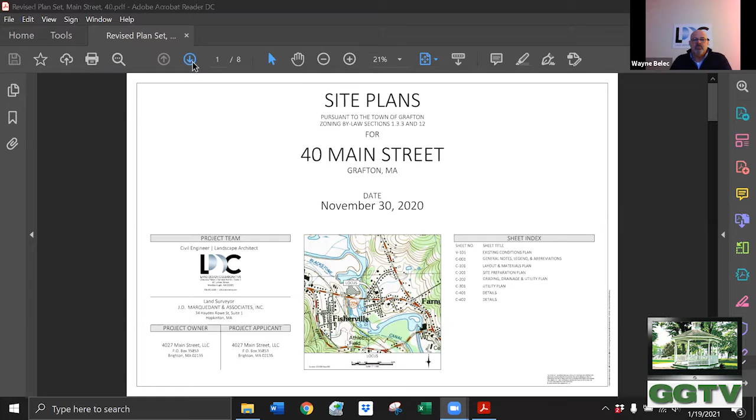So the property, Leah, if you wouldn't mind going to the existing conditions plan - there you go. Thank you. So the property, with north being straight up the sheet, is located at the northeast corner of Main Street and Cross Street. It's about 0.67 acres, and it's located in the Village Mixed Use District.

We had a few meetings with town staff. We had initially met with Chris McGoldrick, and I think Leah was in that initial meeting. And then we had an informal with the planning board to get their take on what was being proposed, and they seemed in favor of it. And then we had an informal with Leah, and that was probably a couple months ago before we got too far into the design.

And then as recent as last week, I had a follow-up meeting with Leah to address some of the questions that she had regarding redevelopment and grandfather provisions under 310 CMR 10.58, the riverfront provisions of the regulations. And then she had a couple things that she wanted to see on the plans as well.

So, like I said, 0.67 acres. The site is developed with 5 buildings on it. In the northeast corner is a garage on a foundation - there's no slab, it's a dirt floor. In the southeast is an old commercial building. To the northwest of the garage I referenced is a shed. And then to the east of the garage is number 27 Cross Street.

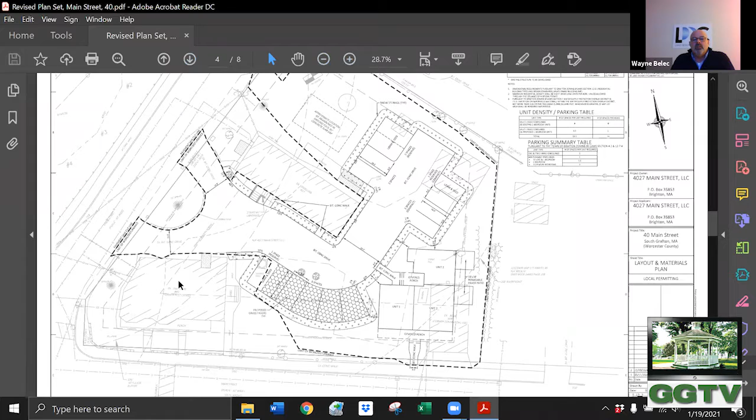What you'll see is a dashed line around the perimeter of the site. That represents the limit of work and limit of disturbance. Leah — or I think it was Samantha — called us on that, and I followed up in my conversation with Leah last week, and I believe I had the same conversation with Samantha, as to why we were showing it as both limit of disturbance and limit of work. The reason is it's a fairly compact site.

When all is said and done, it may not necessarily be the limit of disturbance — we're showing it that way as a worst case scenario. In the event the machine is working in the area and has to do some stockpiling or temporary placement of materials, we wanted to show it to that full extent. So in doing that, maybe the lawn gets scarred up — that would be a temporary disturbance situation.

The site will continue to be accessed from Cross Street. You come in a southeasterly direction, and in the most southeasterly corner of the site, the commercial building will be removed. What we're proposing there is 3 units, all connected, in compliance with the requirements of the VMU district. These will be market rate rental units, as are the other 6 units on the site. As a result of those improvements, we've proposed 14 parking spaces.

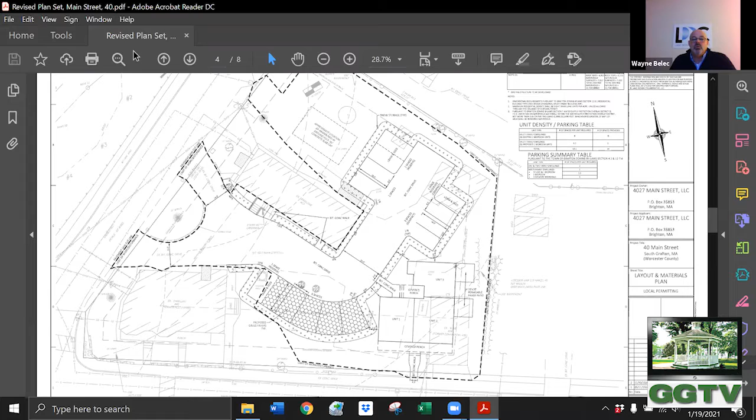Leah, if you wouldn't mind going to the next sheet, which would be the erosion sediment control plan. So one of the very first things we're going to do out here — Patrick is working with a couple of contractors to get some preliminary bids. I did let Patrick know that it's kind of early in the game, but he just wants to have an idea as to what he's looking at for costs and make sure a contractor is lined up to move forward following his receipt of all his permits.

So basically what he's going to be doing is, around the perimeter of the property on Cross Street and Main Street, there are some existing catch basins. He is proposing to install silt sacks, or inlet sediment traps, whatever you want to call them. Then he's looking to install an anti-tracking pad, remove the impervious pavement on site, install an anti-tracking pad out at the project entrance, and continue to install the erosion sediment control measures around the site.

He will be looking to remove the buildings and begin to move forward with the next phase, which would be the construction, the excavation of the foundation of the proposed building, which will then be followed by prepping the area for parking areas, bringing in the gravel, excavating, performing that work, and then removing the existing pool to the north of the building at number 27.

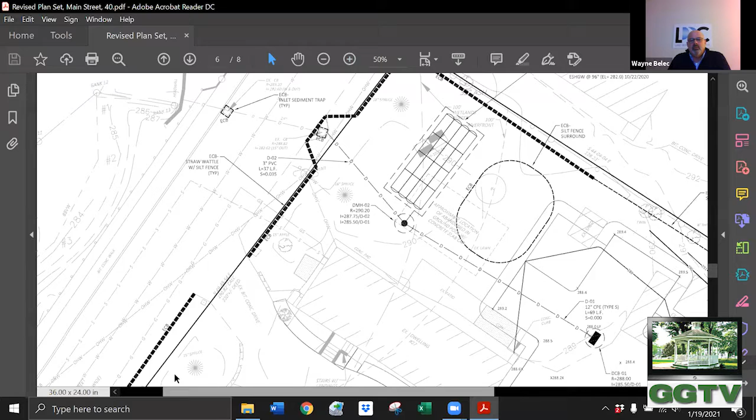That catch basin, I can't see - that rim elevation's a 288. The invert of that is 285.5. And it's a 12-inch pipe. So that puppy is fairly close to the surface, as high as we can get it. And that has got no slope, no pitch on the pipe. It's just going to surcharge and then flow into that structure prior to the infiltration system.

That system will then overflow into the down gradient catch basins. What we have done is we've modeled the site so that there is no increase in the peak rates of runoff for the storm events.

We did run a groundwater mounting analysis, looking at that - obviously having this in this location and having infiltration, detention, we need to maintain the 4-foot groundwater offset. In lieu of that, as you folks know, we could do a groundwater mounting analysis, which sometimes helps you, sometimes hurts you. In this particular case, it did help us as we had groundwater at 8 feet.

So what came from that analysis is we found that at about 2 3/4 feet, the groundwater mounting analysis indicated that the groundwater in that area would be mounted about 2 3/4 feet, allowing us a 2 3/4 foot separation from the groundwater to the bottom of the system. So we had added that to the bottom of the system. By the time we did that, the system was up fairly high. I think the bottom of stone of that system, or the bottom of the chambers, is around 285.5. So it's up pretty high.

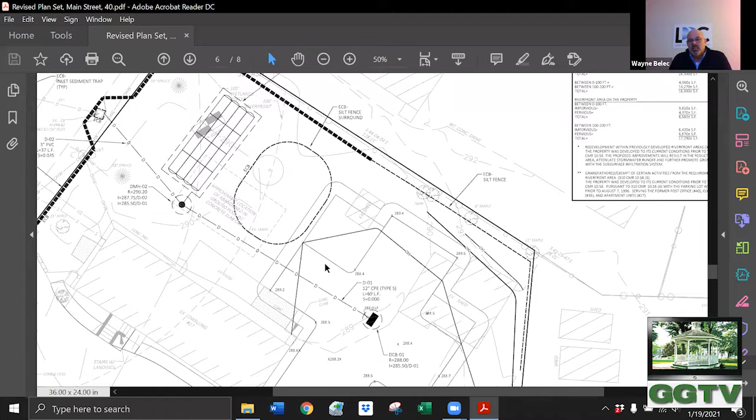So with that, it overflows into the system and into that catch basin. Typically, we don't like to discharge into catch basins, but this particular structure, the existing structure out in Cross Street, is quite a bit of head from the throat inlet to the outlet, some 8 feet or so. The flows coming out of the system showed very little coming out of that basin, so we don't believe there's going to be a scouring issue inside that structure as it overtops.

During the 100-year event, the system is going to get surcharged. The catch basin will get surcharged, it will temporarily pond, and then it will draw down. We have some good soils in this area, so it will draw down within the required 72 hours as required under the stormwater regulations.

That is the proposed grading and drainage plan. If you could pan out for a second, I can show you what we're doing for grading. As I said earlier, it ponded behind building number 27. We are proposing to create that low spot at elevation 288 - it's roughly around 289 currently, or just shy of that. So what we're doing is cutting that down to get the water to flow to that area, and what we found in all the storm events is that we have no increase in the peak rates of runoff.

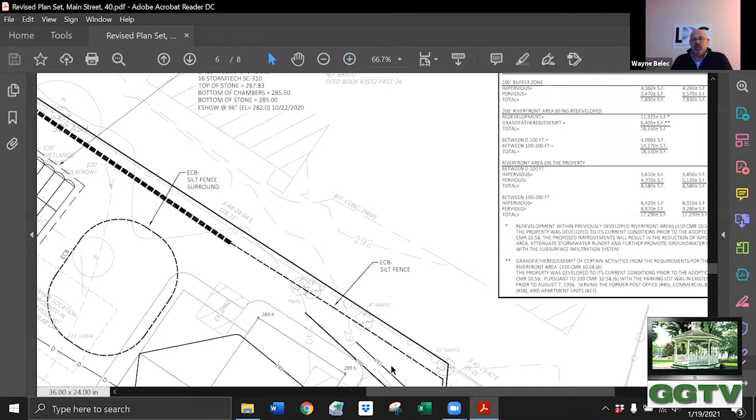In terms of the impacts within the riverfront area and the 100-foot buffer zone, I'd like to direct your attention to the upper right-hand corner of that sheet where I've tabulated the buffer zone and riverfront impact summary.

One of the questions that both Leah and Samantha had was they were looking for some information. We had mistakenly not included the breakdown of the riverfront area with redevelopment and grandfather provisions on your wetland permit application. We had since done that. We had also failed to provide you the elevation of the groundwater, so this plan supplements the initial issue plan, showing that at that infiltration system, the estimated seasonal high groundwater is at elevation 282.

So this summary table, what we said is, okay, we want to provide this showing the impervious area and the pervious area, existing conditions, and then proposed conditions. We've said that we're reducing it. This table illustrates how we're doing that.

If you look in the upper section, the 100-foot buffer zone located along Cross Street, existing conditions, we have 4,360 square feet of impervious. Proposed conditions, we're reducing that to 4,260. The way that's being done within that buffer zone is, if you recall when I was sharing the layout materials plan, along that southerly side of the building at number 27 where we're introducing landscaping, that's where it's occurring, an increase of pervious area within that area.

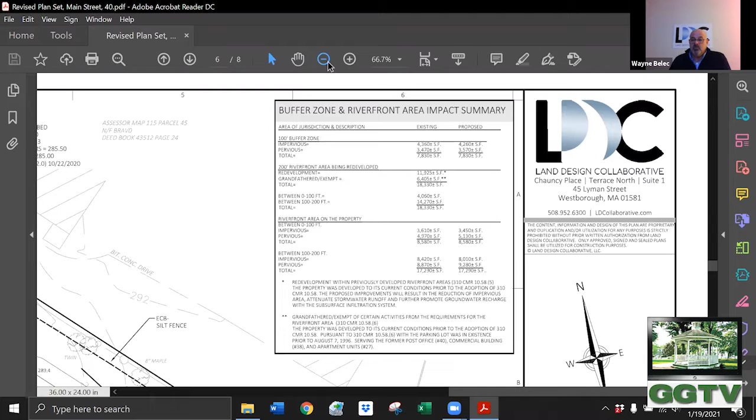So with that, Madam Chair, I want to thank you and the commission for listening. Again, this is Patrick's first rodeo with this type of process, so I'm sure he's enjoying it. So I'd like to turn it over to you, Madam Chair, and you can do your thing.